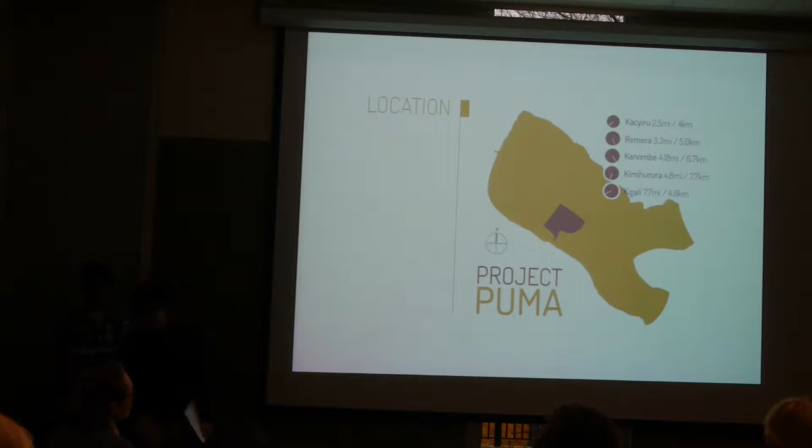Just a little bit about our location, where our project is. Of course, it's in Africa, Rwanda, Kigali, and a suburb of Kigali would be Kinyinya. It's a nice small place. And within Kinyinya, that's where our plant is located. As you can see, those are the distances from neighboring cities, not too far away, about a few miles.

Just a bit of context before I get into the concept of our project. Firstly, I think what most people know Rwanda for is history. The genocide that happened in Rwanda is the 5th most notorious genocide in the world, and it happened really recently, like 20 years ago. There has been a lot of inter-race rivalry between the Tutsis and the Hutus, and that has been a big part of Rwanda's history.

Paul Kagame, the new president, is attempting, as some have said, to modernize Rwanda in the direction of Singapore. But we sort of question that—is it really a road to recovery? Are people still very hostile with each other? Is there freedom of speech? Other groups have addressed that there might not be. That's kind of hard.

The economy of Rwanda, as we found out, is mainly farming. Before the Belgian troops came and invaded Rwanda, the Tutsis and the Hutus, the two main races in Rwanda, often farmed together, and that's a big part of Rwanda's culture before colonization. It is even so today—most people work in agriculture. Four-fifths of the people right now contribute to the agricultural economy; 90% of Rwanda's economy comes from agriculture, so it's a big part of Rwanda.

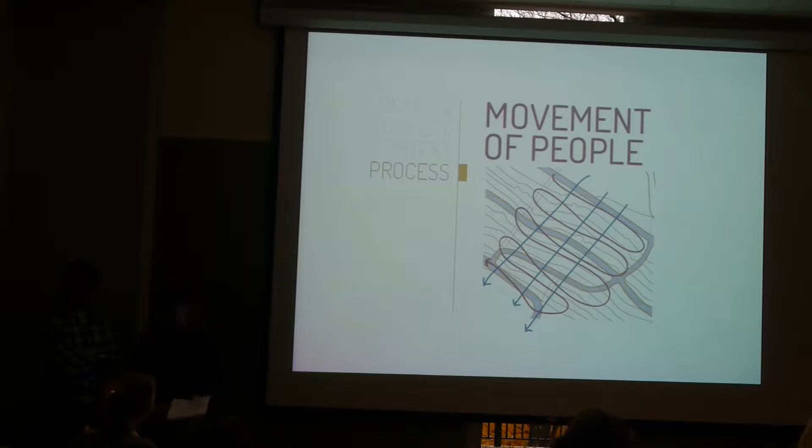And this is the response that we had to that diagram, but we'll talk about that a little more later. So the solution, based on the given context, is first our concept. And our concept is forgiveness. I'll spend a bit more time here, even though we don't usually talk a lot about concepts like this, more about architectural design, but I'd like to stay here for a bit.

First, we believe that forgiveness is an ongoing process. It's not something that happens once, like I forgive you and that's it, forgiveness happened. We believe forgiveness is a process that takes place over a long period of time, and it needs to be addressed in Rwanda today.

Another thing is that forgiveness happens two ways. It's not only the victim that needs to learn to give forgiveness. If a person is hurt, it's not only that person who needs to say, you hurt me, but it's cool. It's also the perpetrator, the person who inflicts the crime, that needs to learn how to receive forgiveness.

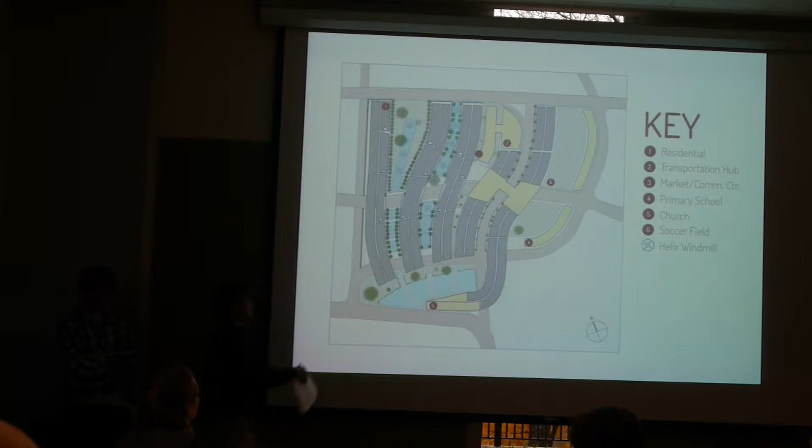This is a brief preview of our master plan, where, as you can see, we want people to move downhill, as well as towards this central focal point, which is the church. And just a few views of our site, the aerial view.

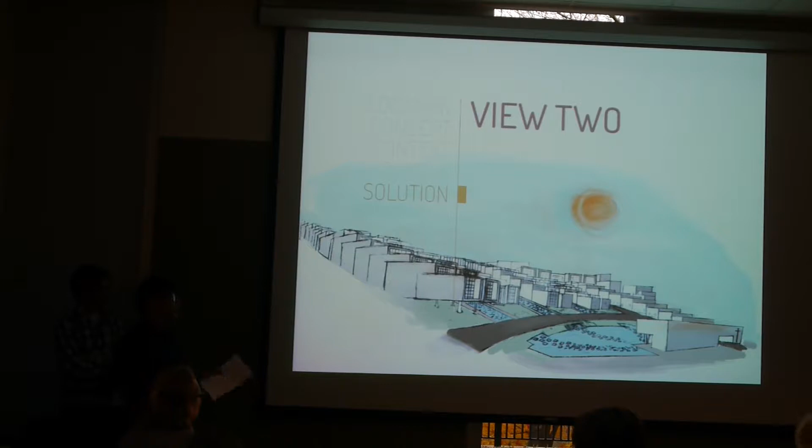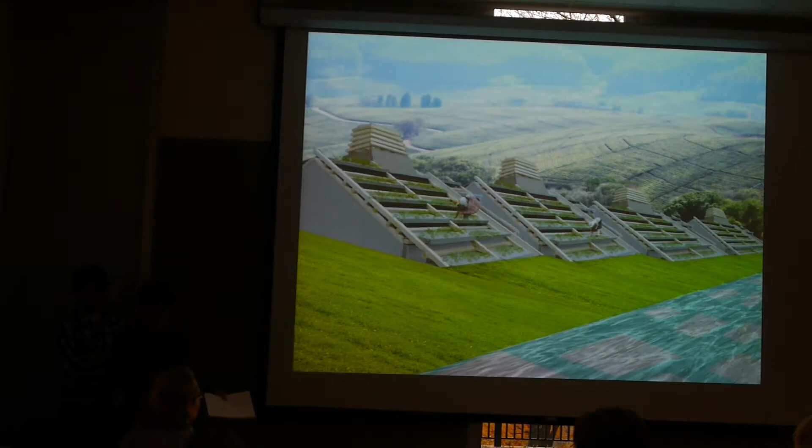This is another view, just the master plan. The housing hasn't been included in the master plan yet. This also shows the experience of the site, how we want it to feel—it's just a rough sketch. Then this is more of a housing typology, which we'll look into further, and another street view, which we'll get into.

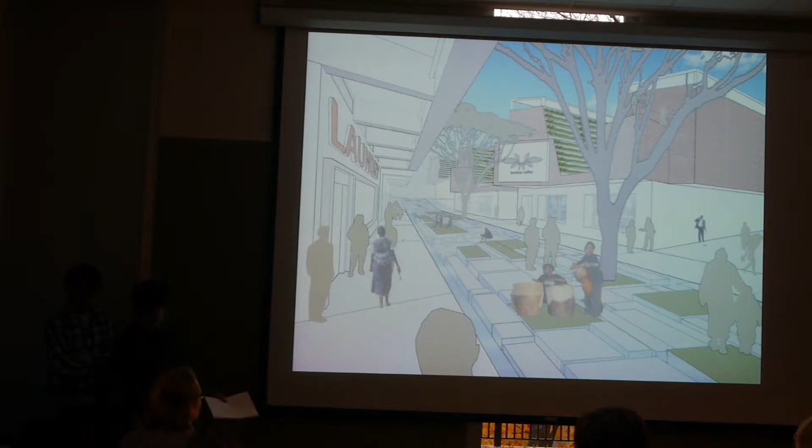Okay, so I'll hand it over to AJ to explain more about his part of the project, about housing development and how forgiveness is implemented. Do you guys need to pause a little bit for the camera?

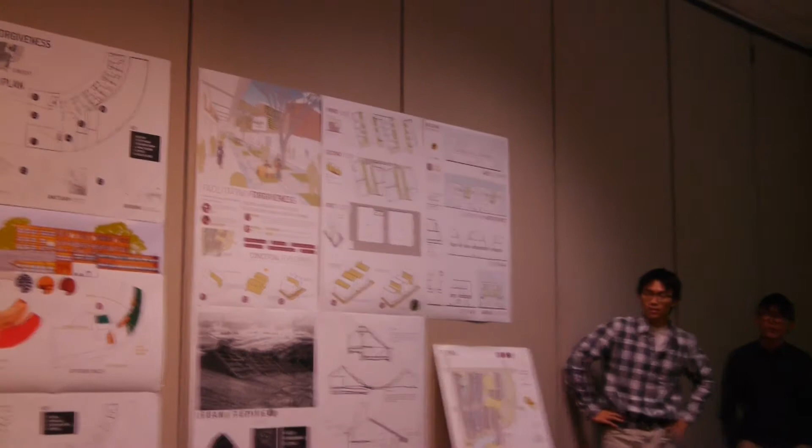We're going to start. Yep, we're ready.

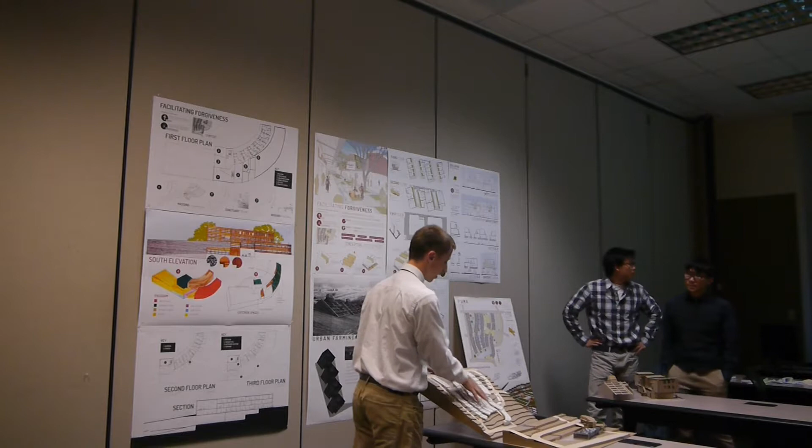As Tim mentioned, we focused a lot on how the church is going to be the focal point of the master plan, so everything lends itself down to the church. In regards to housing typologies, we looked at three different kinds. One key idea tying into this theme of forgiveness was providing housing specifically for refugees, showing them forgiveness first so that they'll be able to forgive others. We wanted to use the church to teach this theme of forgiveness and connect it to the refugee housing.

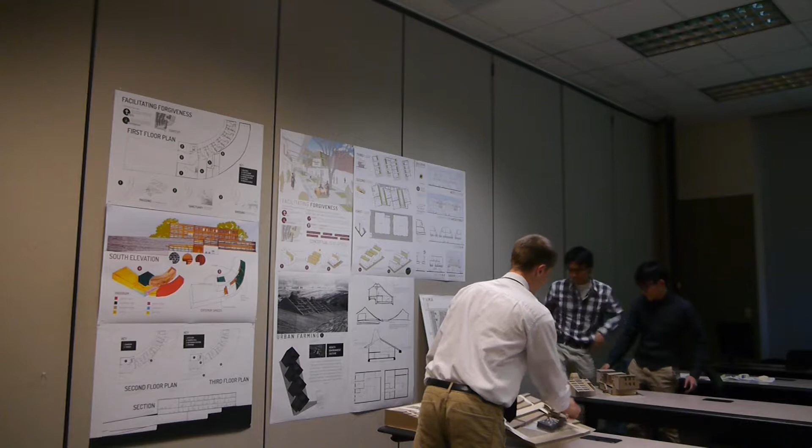So I'm going to have you guys look at the model for that. We have the church here, which is the bottom section of the site, and the housing itself is actually connected directly to the church. To develop that housing and get into the details, I first had to look at what the design of the church is going to be in general, and how that would shape the housing.

Originally we used this kind of flow from the master plan itself to create curved pieces that led into the curve of the entire master plan and extended down. They were pretty simple in general, just getting the massing down.

But after looking at the population we'll have on our site, we might have close to 300 units, which could be up to 1,500 people. Considering that, the number of people we'd want in the sanctuary at one given time is a lot—several hundred people. So this shape eventually expanded and took up more room than it originally did, taking away some outdoor space, but emphasizing the idea that we want to create a community where they're all in this one space together, growing together.

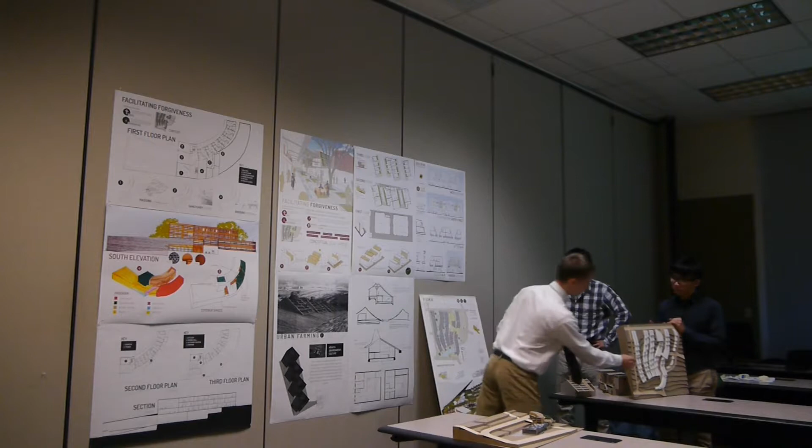So the sanctuary itself grew, and this idea developed throughout the master plan of bridging. I'll touch on that briefly and come back to this. We have these bridging elements all throughout—you can see it on model 2, going over the roads. There are three different tiers that we've developed.

This first tier of bridging over that road connects the housing units, but the bridging itself is going to be community spaces that tie the community together—something a little more relaxed and peaceful, like a library. Whereas the other spaces overlooking the water element, this pond at the bottom, and overlooking the church, are going to be a little more interactive. They have a nice view, so there's not as much need to bring serenity and peace there, whereas this one's right over the road.

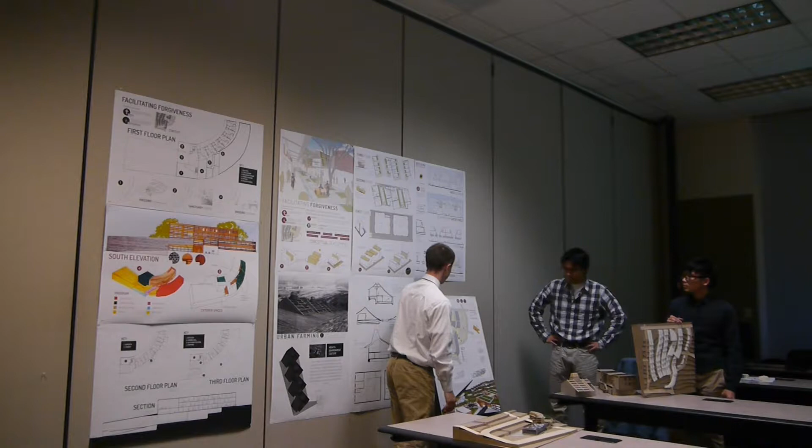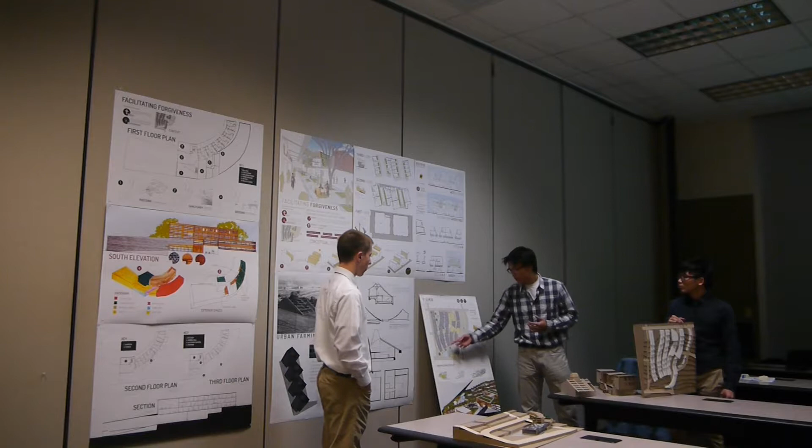I wanted to have you briefly explain how—so what we were thinking is, what does this bridge mean? It turns out these bridges serve as a community fabric connecting the entire community together, and that's what we thought of for the tiers. Each tier represents something different: the first tier is this knowledge and serenity place where people can sit and understand, maybe different bridges representing different cultures of Rwanda, and the bridge at the bottom could represent looking toward the church and feeling that activity going on in you.

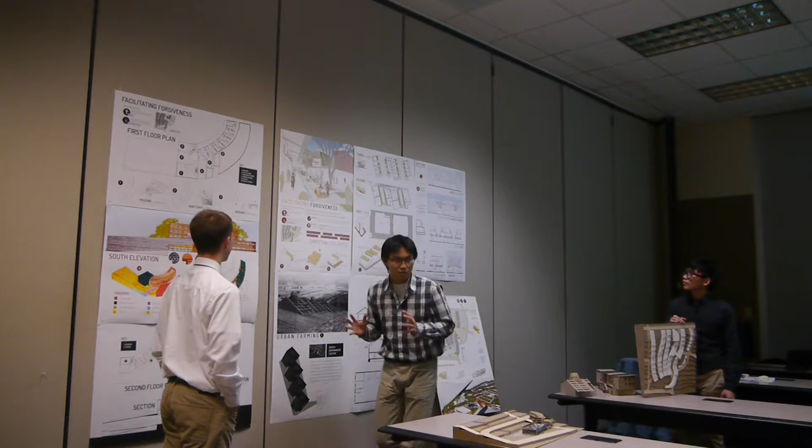Another thing I'd like to turn your attention to is the design of the bridge. Since these are roads, we wanted the bridges to be an environmentally healthy place where we could place vegetation that sucks carbon dioxide out of the traffic moving below. This separates community activity from traffic activity, so when you walk on a bridge, you won't feel the traffic moving below you because the vegetation surrounds you and makes you feel like you're in a different place.

These tiers are really trying to help drive the community together. The last tier, which is more of a refugee space, strengthens that idea. This final tier is the connecting point, bringing refugee housing to the church and emphasizing bringing them back into community through the church and these connection points, rather than being a separate entity. This shaped the architecture of the building. We carved into the structure and space through the street that bridges everything together, and from there developed the program of the structure.

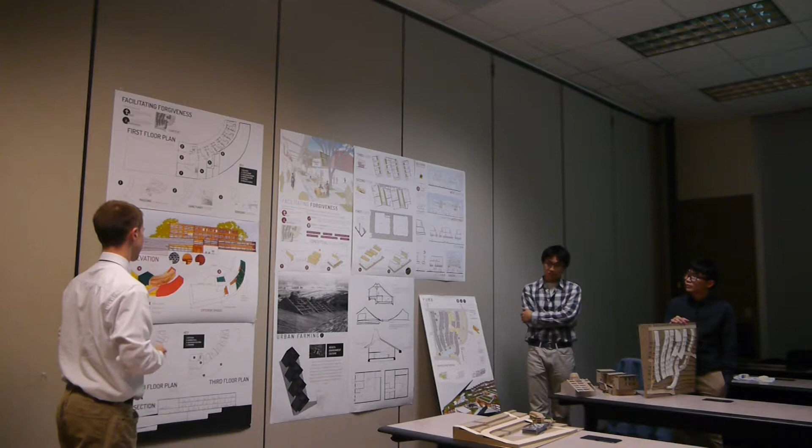What additionally developed because of that were these community spaces. Instead of just having housing the whole way across, the transition between the housing and the church is made up of these community spaces, which developed to draw together the people specifically living there. We have three community spaces on the first floor.

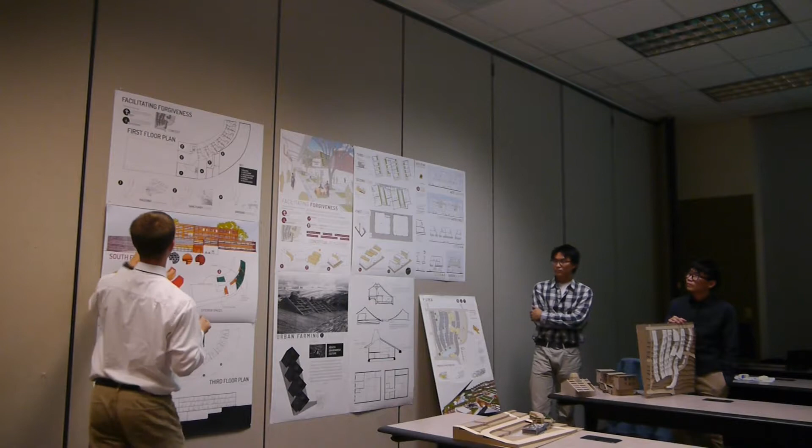We have youth rooms, because I think half the population under 18 years old currently in Rwanda—or was it under 10? You might be right, under 10. No, 18. So there's a lot of youth, and there's a huge need for taking care of them and keeping them focused, so we created these spaces for them to enjoy. This is also an extension of a balcony in the sanctuary, but the community space is mostly for children and things like that.

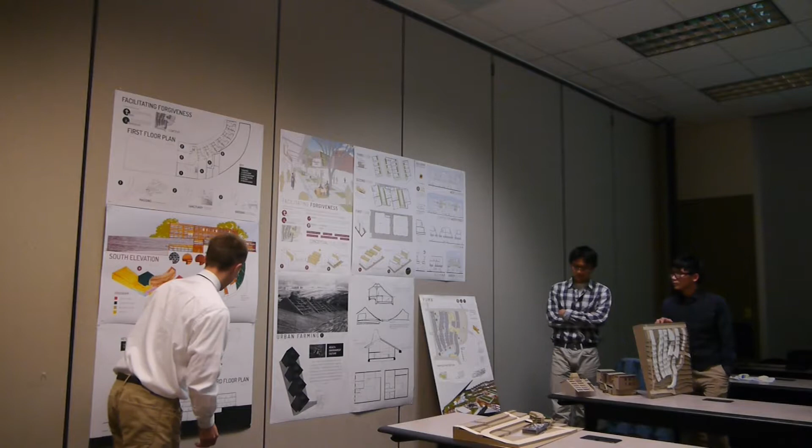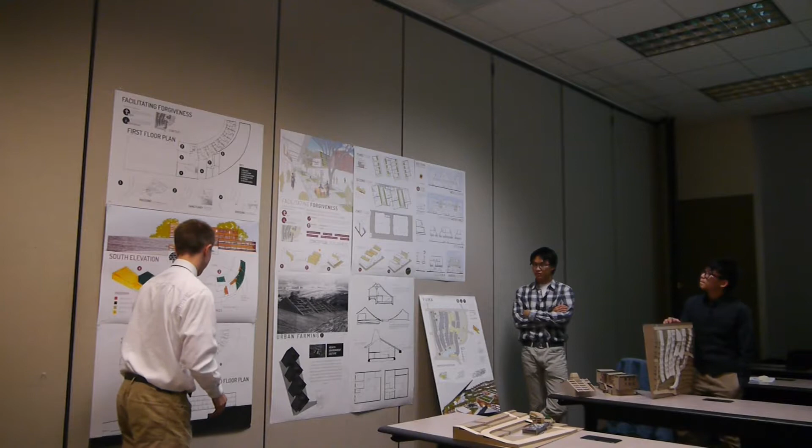Like I said, there's spare housing, offices, and a health clinic. On the second floor of the housing, there would be a dining area and dining hall, with a kitchen. This is useful because the spare housing could potentially be used by youth groups or overseas missionaries coming to help out this church. They, along with other community members, could serve the refugees and cook meals for them through this dining space, showing them through service this idea of forgiveness and a desire to interact and connect with them.

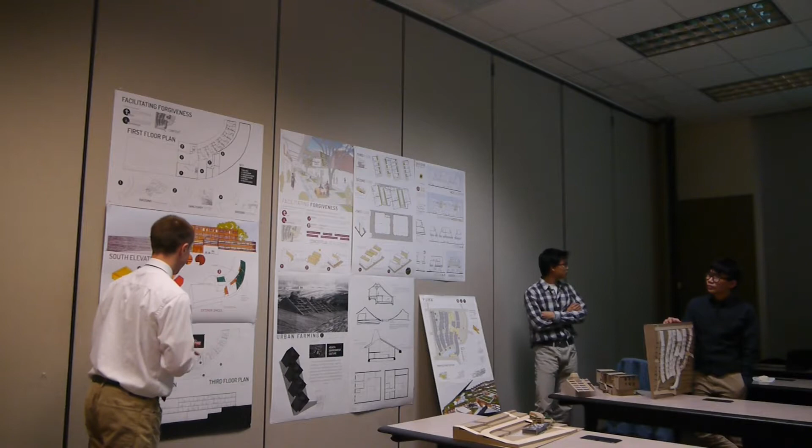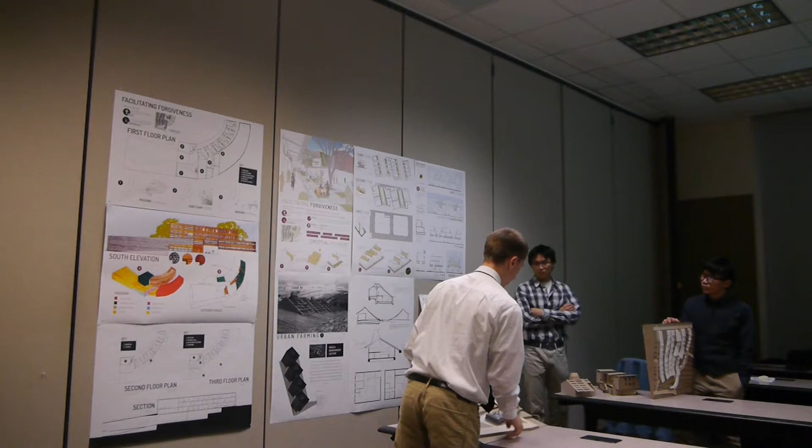On the third level, there's an outdoor garden space for them to enjoy and relax in. Housing-wise on the third level, it's mostly larger families, so they're able to find a more relaxed space to retreat to if needed. In addition to the second floor dining area, there's also farming on the roof of the health center, which you can see on the model. Farming is one of our key concepts that Derek is going to touch on.

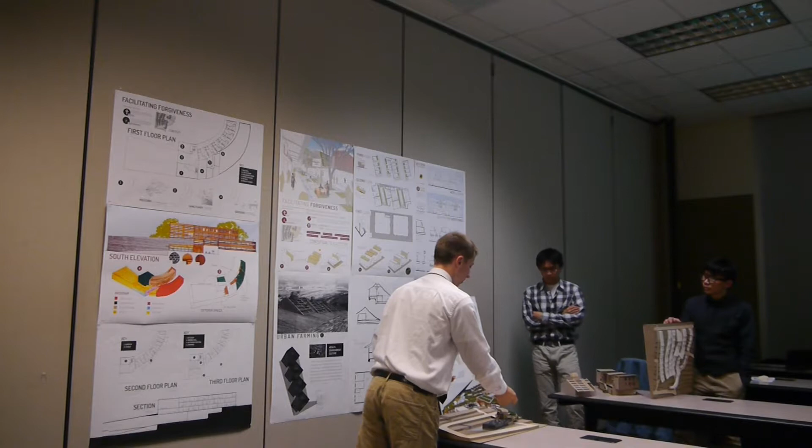Farming is one of our key concepts in the overall master plan, connecting people. That would be a great idea to have additional farming for the refugees specifically, to be able to either learn how to farm or just produce food for themselves and connect in that way.

As we were doing our research, we found that before the genocide and all these tensions, before colonization, and before the hatred between Hutus and Tutsis even began, there was harmony at one point. When they first both moved into Rwanda and started living there together hundreds of years ago, there was harmony, and it was often found in farming, because they were farming together and working together. So we want to bring back this unity through farming and connecting them again in their work.

So then I'm just going to touch briefly on that, which developed the outdoor spaces, and then the program, or the housing itself.

The first floor was simple, with 6 units that are slightly smaller. On the second floor there are 5 units, a little bit bigger. The third floor has 4 units that are even bigger. They're all pretty simple designs with a bedroom, a kitchen, and a bathroom, so they all have their own amenities.

The third floor has an outdoor porching area for them to be able to relax on, for the bigger families, which is also shared with their neighbors.

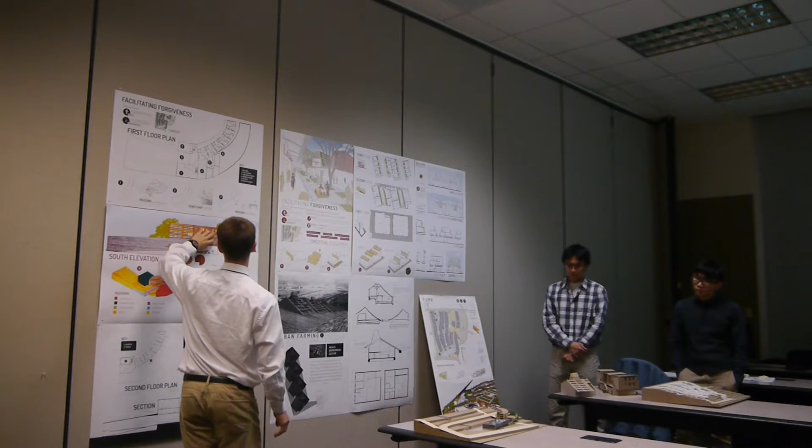The last thing I'll mention is that the facade itself also lends to this bridging concept. We really wanted to use wood for this bridging they mentioned, kind of cleansing from the pollution that's happening underneath in the street. So there's a transition using this wooden facade on the health center, and slowly going from the wood to what's behind, which is this brick material they use in Rwanda, CSEB.

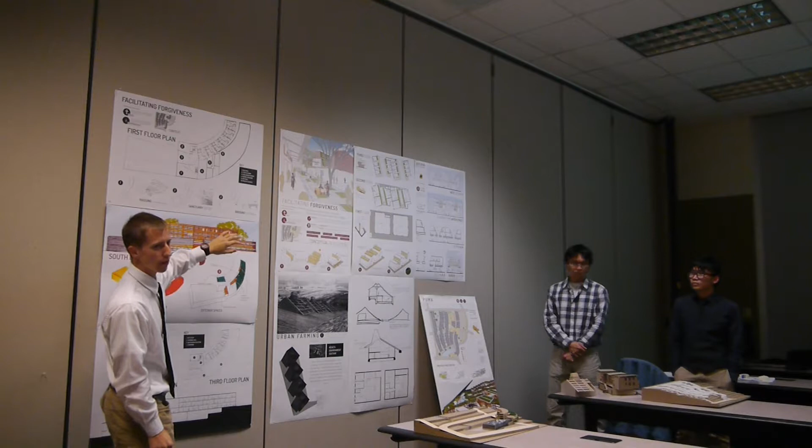CSEB is compressed stabilized earth block. Using that material and revealing it more and more until you get to the actual sanctuary, using basalt, another local material they use a lot, contrasting it and revealing the importance of this structure. So that bridge again becomes this connecting element that flows from one space to the other without a harsh reality change.

As you can see here, there are actually 3 different types of farming on this master plan. One is just the traditional land farming, which Mr. Rosanich has here, and then we have vertical farming, which Timo will explain later. And then we have step farming, which I will get to next.

The concept of this step farming that we came up with is that we want to try to encourage people to farm. How we did it is we tried to make this idea of farming very visible in a lot of aspects.

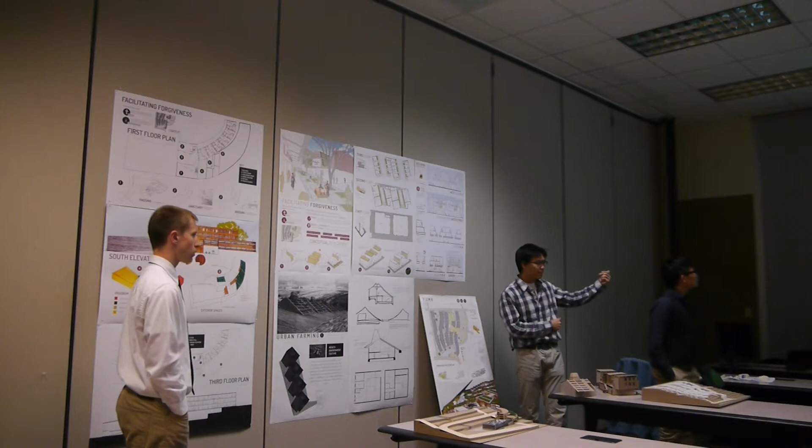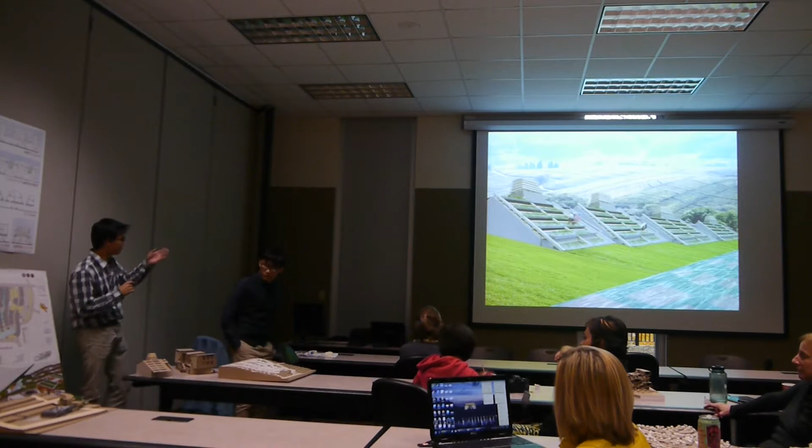That's why the step farming, as you can see there, when you walk down the street you can actually see people taking care of their plants, and that serves as a kind of community driver. Because when you're planting these gardens or vegetation, other people pay attention and say, maybe I want to work as hard as them, because that will make the community much more beautiful. That's the driver we want to pull into this type of housing typology.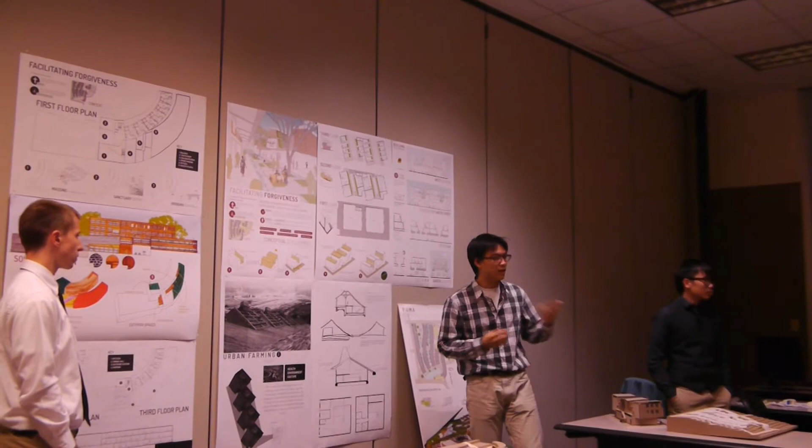We tried to incorporate the roof to be sort of the step farming, so the roof will have a module, kind of a vegetation module, and in between this module will be a void that the wind can go through. So whenever they're farming, they can smell what they are growing, and in turn that will be a really good healthy driver for people, because if you grow something, the scent that comes to you would actually help your body.

And every day when you work around the kitchen or living room or enjoying, there will always be this kind of enjoyment, because you're working, but you're working for your health.

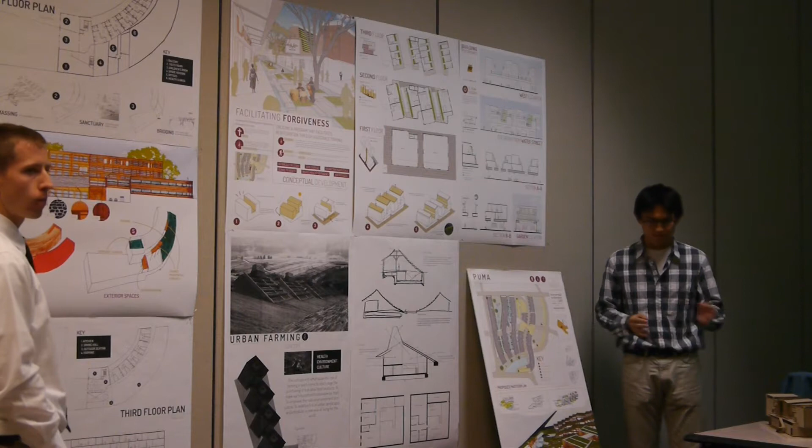So when we were studying this, we actually went a lot into what is actually in the industrial markets, when you buy stuff on your grocery stores. A lot of stuff we found out, such as with research on Monsanto, which is a GMO company, the stuff that they put in our regular milk, and even the vegetables that's on the market is just terribly disgusting, and we don't want to eat them anymore.

So how do we save ourselves from those kinds of things? Well, it's farming by ourselves, and controlling what we eat. In doing so, we encourage other people to farm and to live healthily, so that we don't live less.

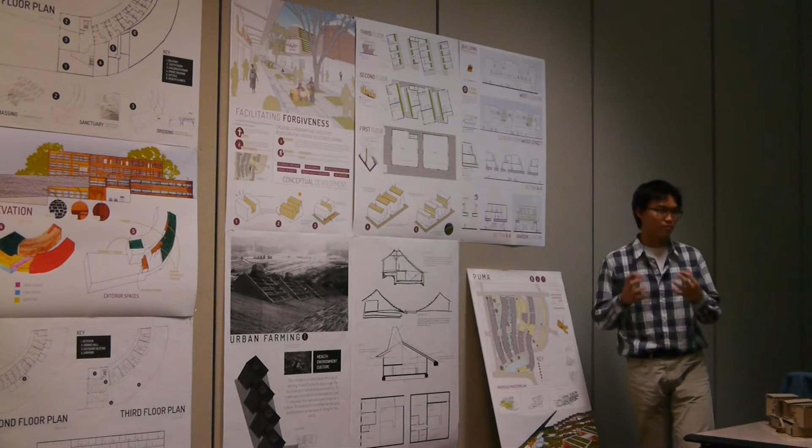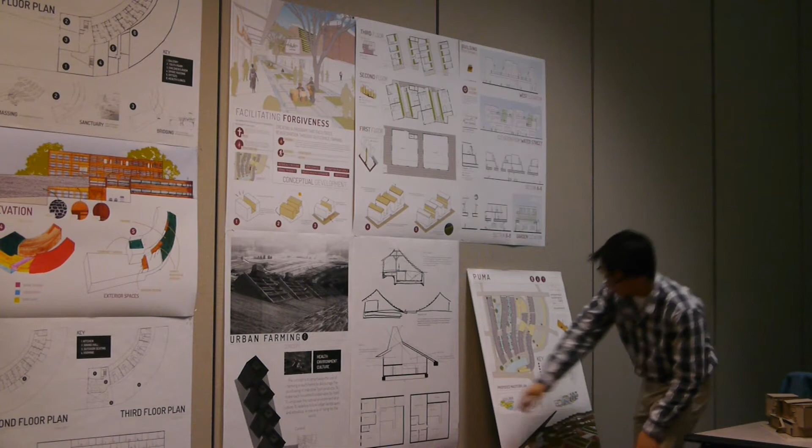The other thing we're trying to do here is, as you can see, we try not to have so many rooms. We try to have the space feel very open, so that in any direction, except sort of the covered basement area, the air will be able to penetrate through, and the light will also be able to penetrate through these voids in between the modules.

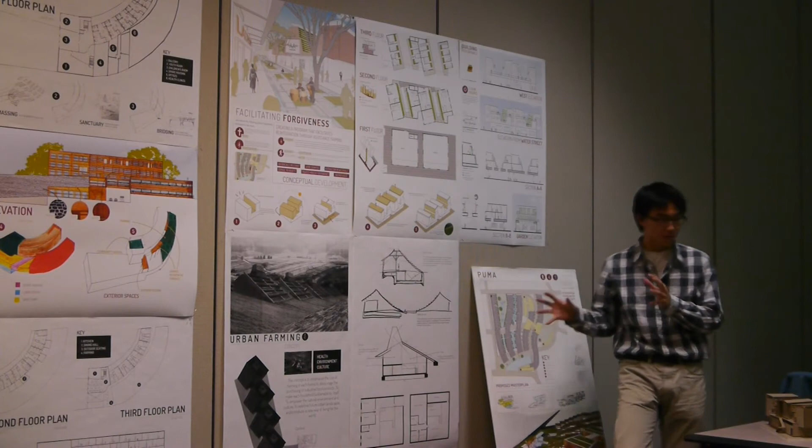One of the things we thought about is also how the air is going to move around the building. Because there is less of a chance where we could actually put too many fins, we want this to be a metal deck and sort of a solar chimney, where the air coming in would follow this metal deck, which, when the sun heats it up, would allow air to go to hotter places, which again allows this air ventilation through.

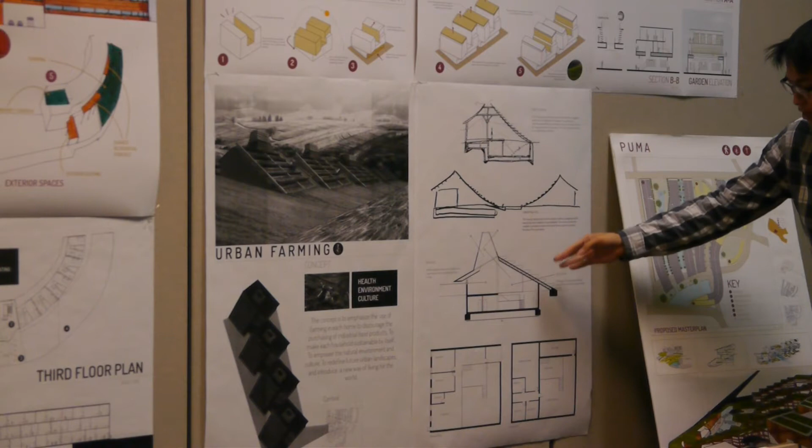So what we did over here is provide air to go through from the voids between the modules, and here we have fins to provide the wind to go through, because we can't really have it all the way through, since there's a kind of bedroom here.

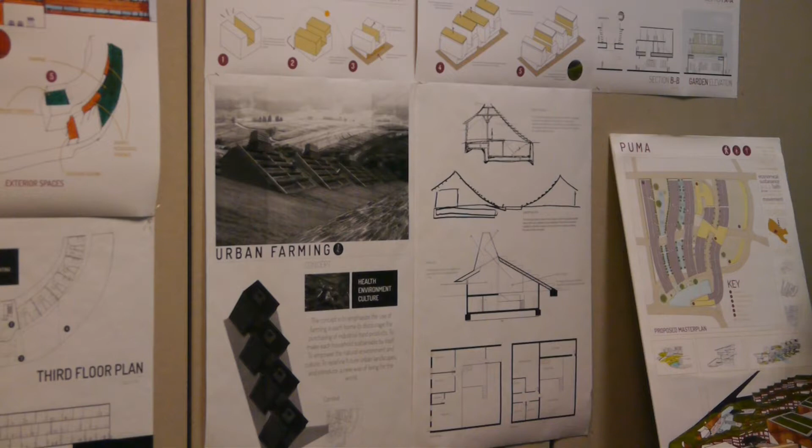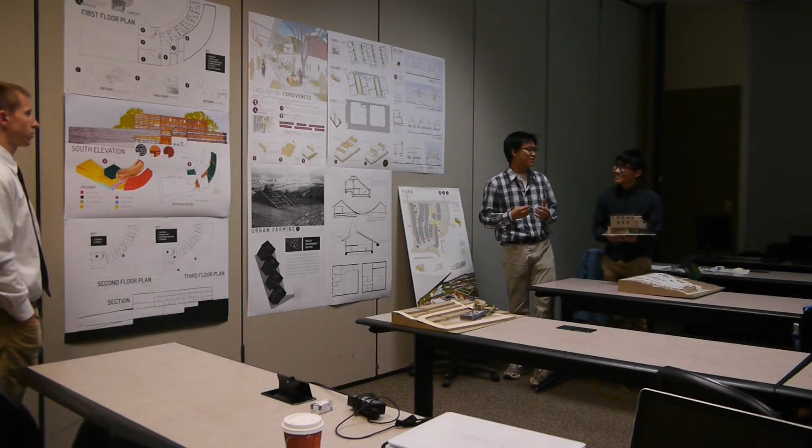So I think I already explained almost everything. Overall it's health, promotion of health, promotion of environment, and again, as Adrian said before, promoting the original culture that Kigali and the people there had been doing for centuries to unite themselves, until the Belgians came in and kind of messed everything up. But anyways, right, yep, so this is the model.

So this is the last part. Just to sum farming up, I think we're going to close that topic. Farming is historically relevant. Working dignifies people. Interaction between locals can be fostered by farming together.

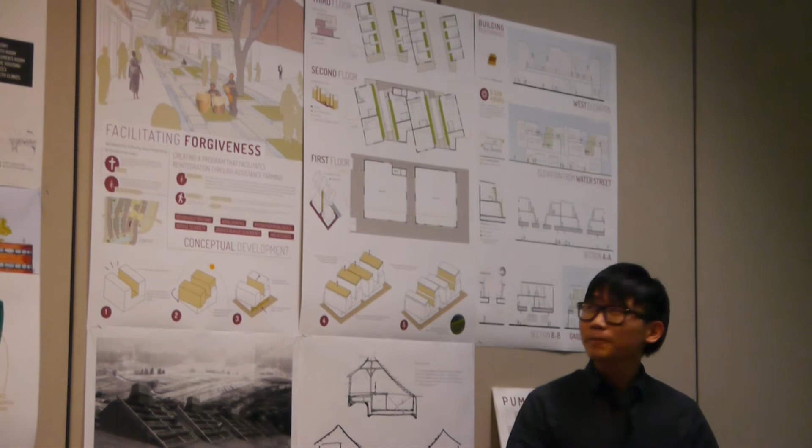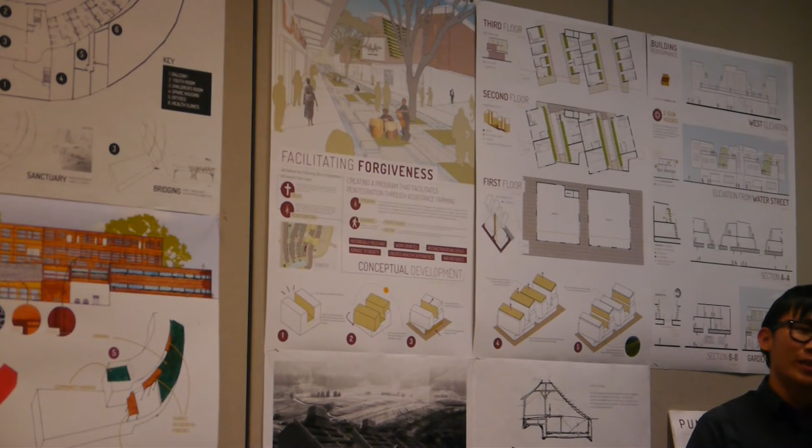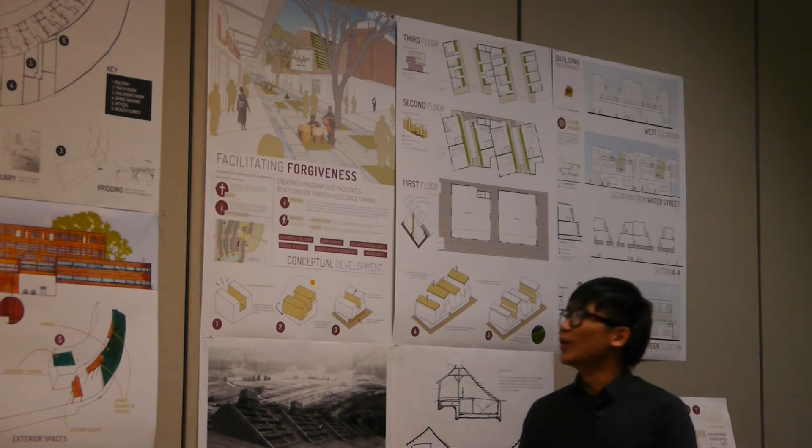It's interaction between locals and refugees, which is in the refugee housing. It creates healthy dependency, not independency, but healthy dependency on each other. And it's a service not only to our small sub area, but also to Dana's group, because we're going to sell vegetables to them in the future. So that just sums up farming, I guess.

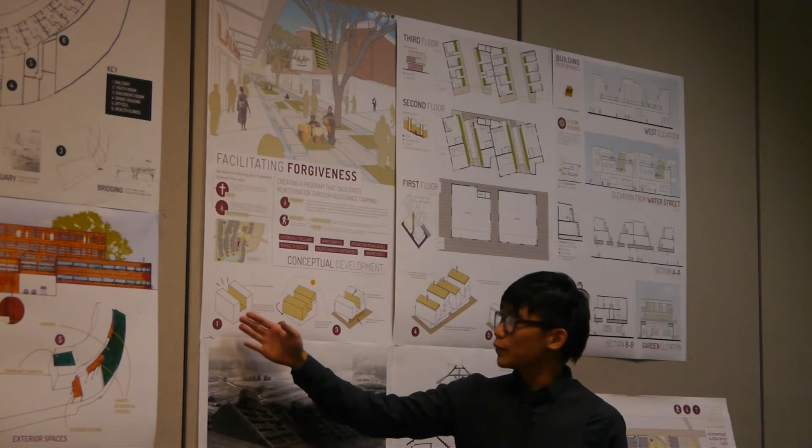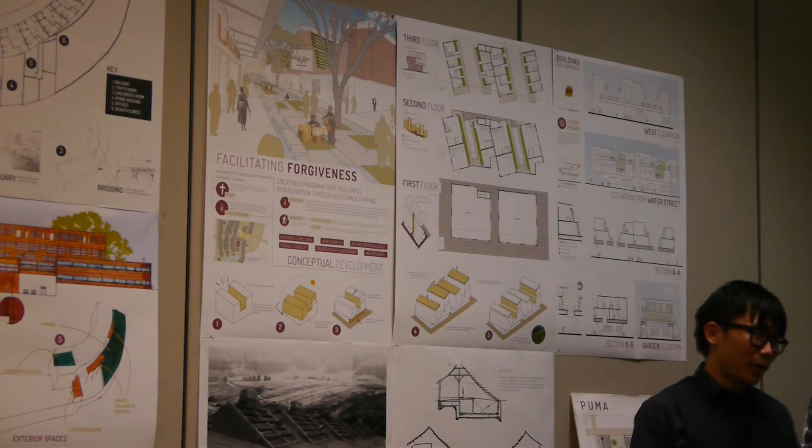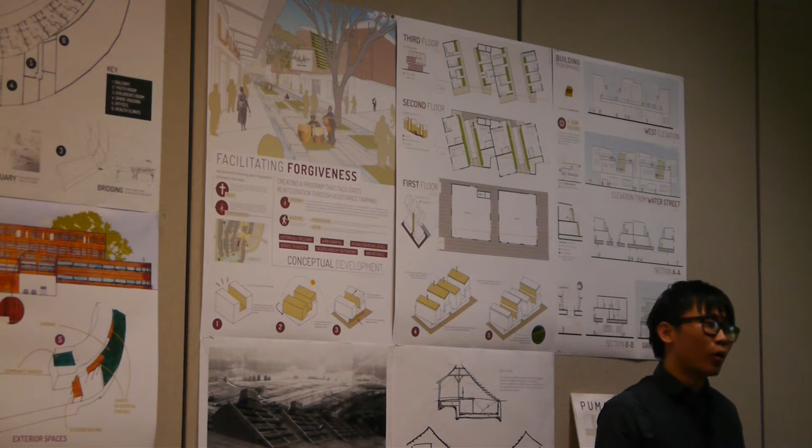So for my project, I have a lot of similar themes to that of Jarek, for example vertical farms. Let's just go through my project. Firstly, I really wanted my building to gain maximum sunlight so that the plants receive sunlight all year round. As you can see from my model, the top is actually twisted in order to orient itself to the east-west axis, so the sun is always overhead all day long, giving optimum sunlight for the plants.

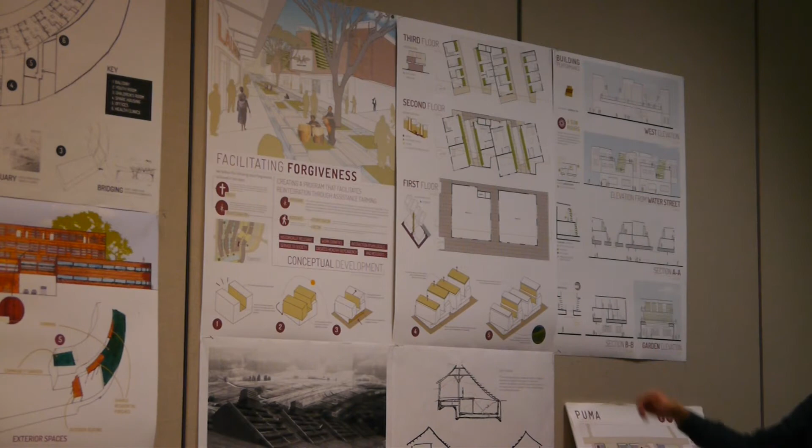And then to maximize that, I slanted the walls. You can't really see it in my model, but you can see it in my section, in order to give maximum sunlight, as the sun angle affects it a little bit. The last part is that there are 2 levels of farming, and looking back at how Rwanda is famous for its step farms or terrace farms, I would like to include that as part of my project, having terrace farming.

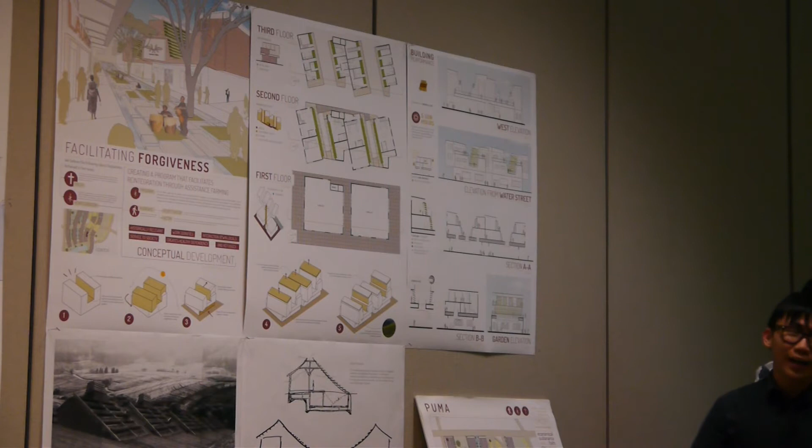A bit more about energy. I think energy is a big part in Rwanda, and how amazing it would be to produce architecture that can generate its own energy. With the annual consumption of Rwanda being only 23 kilowatt hours, and the amount of sun available, a photovoltaic system can be implemented that would be extremely effective and produce green energy. That's something that should be implemented in Rwanda.

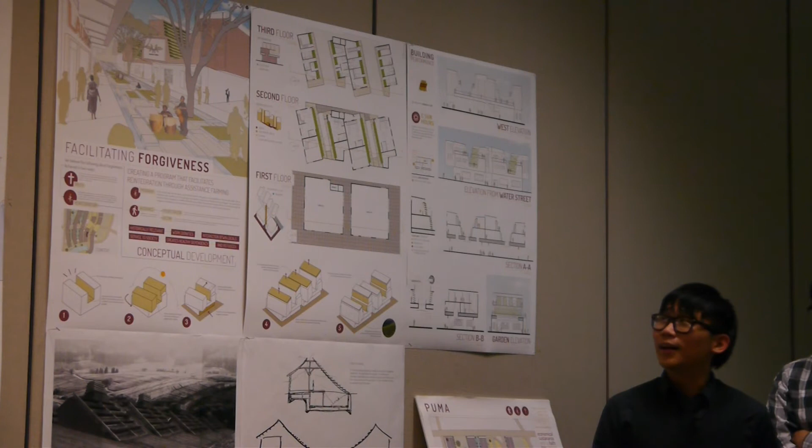A little more about the programmatic use. I really want this not to be exclusive to housing, but also to have shops below, forming a mixed programmatic kind of street, as you can see in the rendering. I want there to be sufficient interaction and convenience between the people who live there and the retail below, fostering interactions between locals and developing a close-knit society actively engaged in economy and service between each other.

So that sums up our presentation. It's a bit long, but I think we covered most of it.

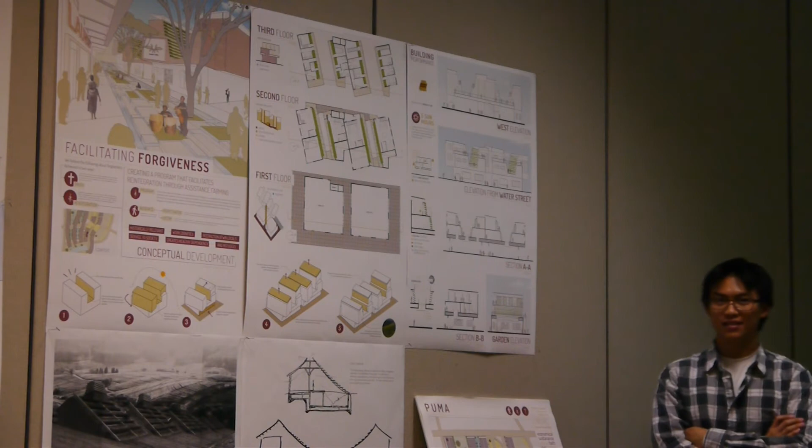At 1 to 100, we might want to get a little closer to the drawings, but there are a lot of interesting details to be looked at in all the projects, especially in section.

Before we get started, I think this is a really cool image to look at, but it's a little misleading. The perspective is a little off, and the way you've shown the water is a little intense. It looks like a river running through a field with houses in it, when actually the project is very urban, with houses at street level. When water moves through the site, it's going to be more like this render with the twisted buildings. Why don't you guys talk about that strategy, the water movement strategy in your master plan, and how it pertains to that image especially, but also to city life?

You want to start the concept? Or do you want to do it? Yeah, you're good.

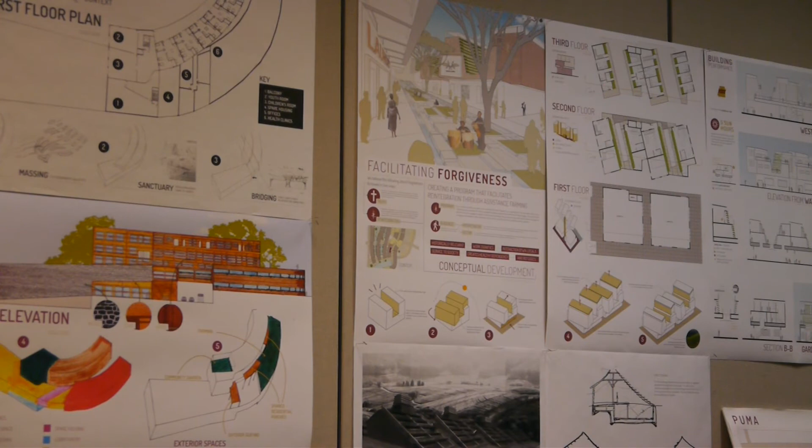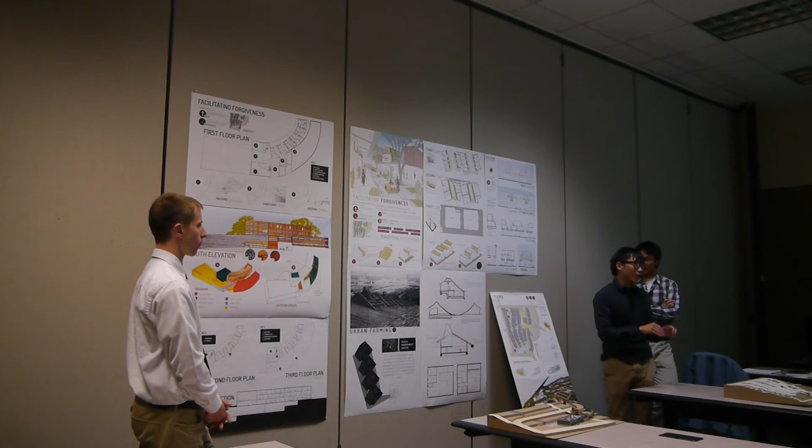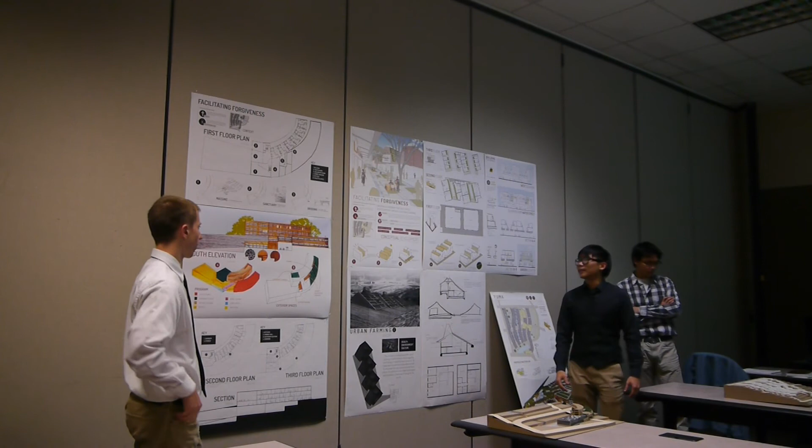By analyzing the topography of the site, water moves downhill - common knowledge, right? We believe we can channel this water by placing rocks at different elevations to slow down its movement downhill so it doesn't rush down and cause landslides, which is important for the topography of this site. This also serves as water collection throughout the streets, which is important for such a topographical area. Philosophically, the river flowing to the church represents movement going to the center of this community, and since the center of our community is intended to be the church, the river flows there, creating a central focus that makes our site unique.

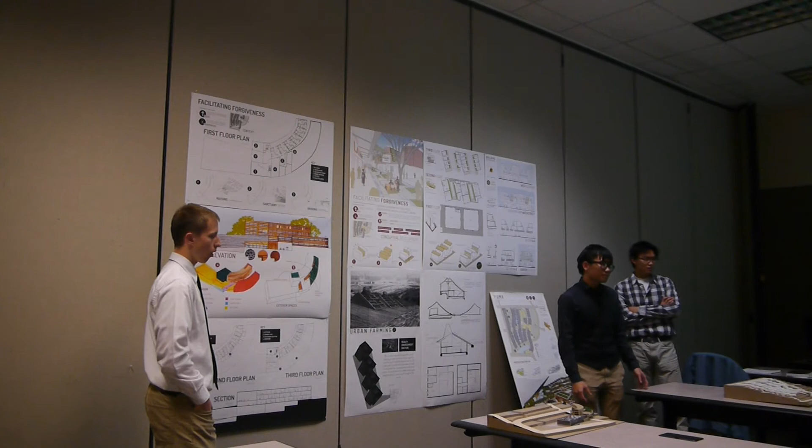Can you explain more - I imagine that's like traditional housing in the first drawing, or which one? Sorry, what's happening here?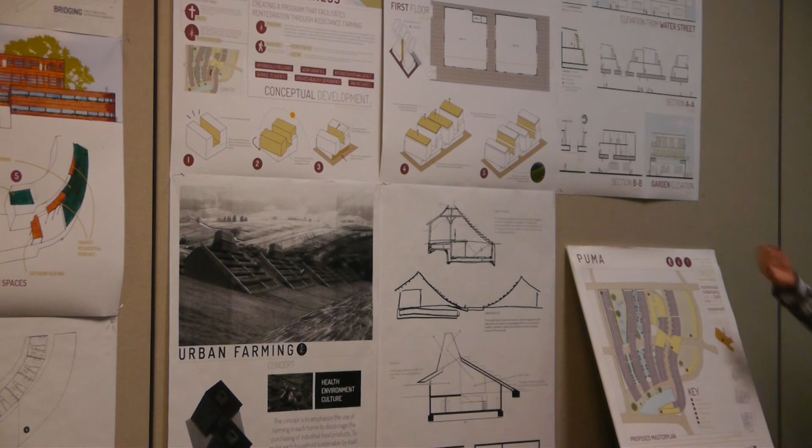Oh, this was sort of an experimental move, for the ground to be lifted. Although we felt that didn't exactly work when we were implementing it, so we actually deleted this part off and just made it concrete on wood, or just concrete by itself.

Talk about the airflow though - I think that's probably what she wanted you to speak about. The ground is relatively cool, we felt, since the ground is relatively cool.

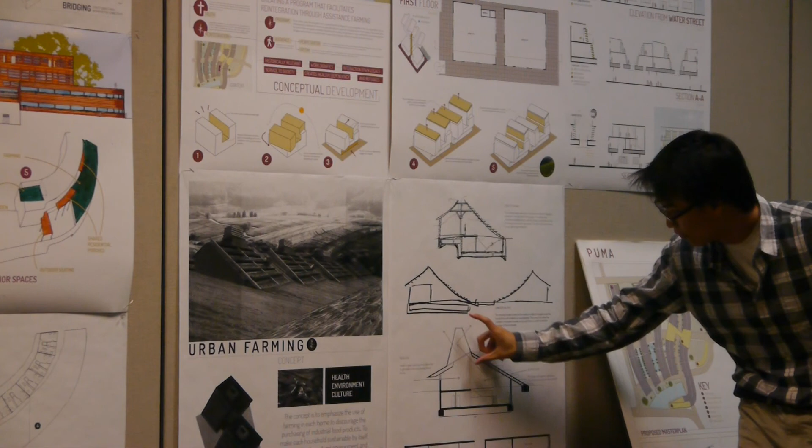It's hard to tell where grade is, Derek. It's sort of right here. So that lower level is below ground - yeah, that lower ground is below ground. The below ground can actually be fine, because the soil is cool enough that cooling would not really be an issue for the below ground. But we have the airflow going back and forth, up to the top on the main floor.

The reason I was asking is I thought there could have been water or airflow going on in that part of it. I looked at several buildings, and a lot of them have water underneath, which brings a cooling system, and the actual building is ventilated and cooled by the water that is underneath. So since you have quite a lot of water, you could, if you need...